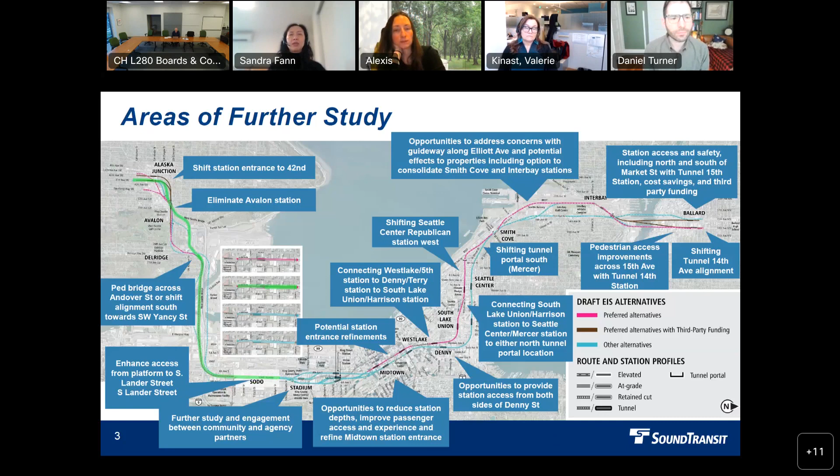This is just a quick snapshot. We actually have more details later for specific areas along the corridor where a lot of our engagement has been focused.

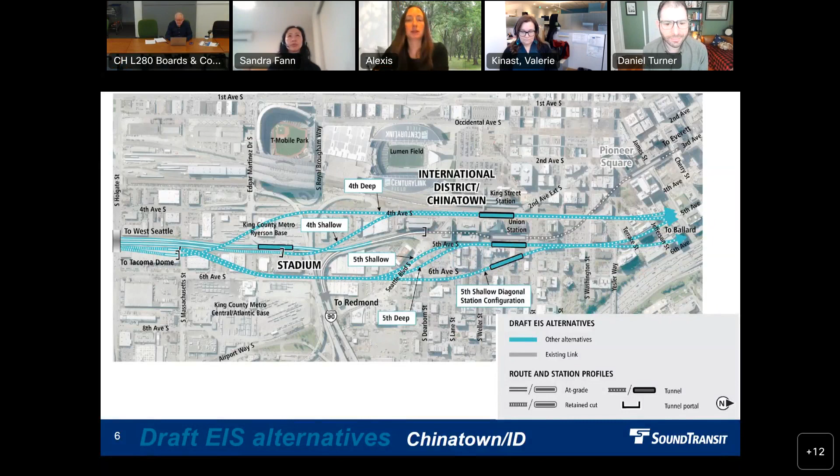So the board had directed a series of further study elements for the CID, including desire to seek to address the remaining questions, or minimize potential impacts and maximize community benefits, explore how to create an integrated, well-connected hub for all modes, opportunities to enhance ridership and access, activate or modify use of Union Station and Plaza, as well as funding and cost-saving opportunities. And then include study concepts requested by the community and agency partners, including but not limited to work to define a 4th Avenue shallow tunnel option with the goal to maximize benefits while minimizing costs and impacts.

Slide. Alexis, do you want to cover a bit of the engagement activities that we've conducted over the last several months? Yeah, I'm happy to. Thanks, Daniel. So you can see here some of the specifics of the engagement on transit in the CID.

The core of the work was workshops and open houses that spanned over the last 5 to 6 months. The goal was to have meaningful engagement that was iterative, so the intent was to have community feedback at each of those meetings shape the scope and direction of that further study efforts and engagement process. So that was the foundation of our engagement.

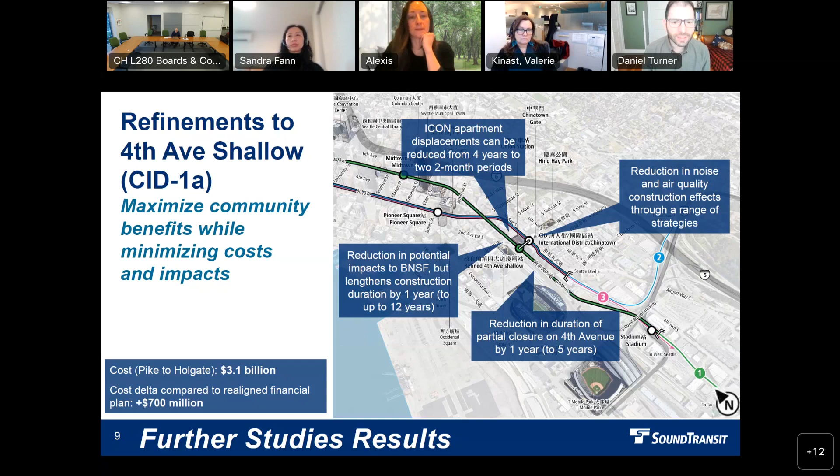So this is summarizing some of the community feedback that we heard through this process on the 4th Avenue shallow alternative. There was some interest in a shallower option to facilitate quicker transfers, but others were concerned about the additional potential impacts of the shallower alternative.

There was interest in any potential construction efficiencies across public projects to minimize disruption and harm to the CID and Pioneer Square residents. We heard a lot of concerns about construction duration and traffic detour effects with this option, including potential impacts to CID businesses, residents, and services. But there was strong interest in a transit hub with centralized access to the CID, Pioneer Square, and other transit modes, as well as activating Union Station as part of a broader community vision.

We'll talk about that in a few slides. And we definitely heard some interest in a Midtown Station location for access to First Hill.

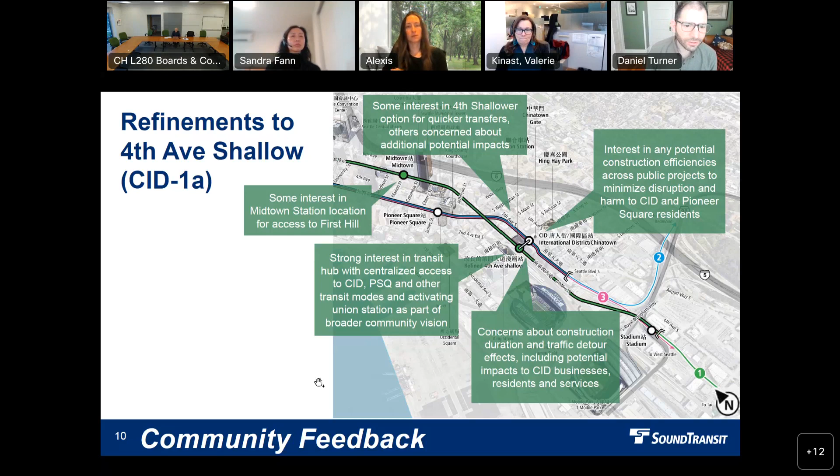Through the further study process, other station locations were identified for a station near CID. This option is called the station north of CID, and again, this came out of the community process that Alexis identified. I'll start with the costs here and then describe a bit about this option since it's new.

For that same segment identified in the previous option, this cost would be $2.05 billion from Pike to Holgate, and that's a cost delta of minus $360 million compared to the realigned financial plan.

I'll go through the graphic a bit before going through the comments. You'll notice the dot where the CID station is near Jackson Street—that would be the existing International District station. A new station here would instead be north of CID, adjacent to the Pioneer Square stations. You can see that green dot to the north there.

This would essentially consolidate the Midtown and CID stations into a single station and provide a transfer opportunity between the 1, 2, and 3 lines at Pioneer Square instead of at CID. A lot of that cost delta is because of the removal of a station with this option. So again, this consolidates the Midtown and CID stations.

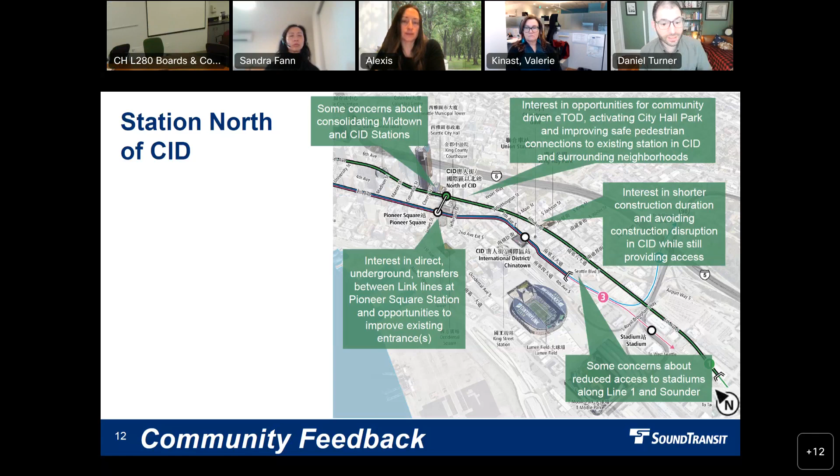Next option explored was the station south of CID. We'll start with the cost and then move over to the description. On the bottom left, this would be a cost of $2.5 billion in that same segment, and that would be a cost delta of plus $80 million compared to the realigned financial plan.

This alternative is shown on the graphic. Again, we'll start with that dot where the CID International District Station is at Union Station. Along the green line, you'll see a dot to the south between Seattle Boulevard and Royal Brougham Way. There would be entrances at Seattle Boulevard and at Royal Brougham Way, just south of Uwajimaya and near the existing stadium station on the south end.

This option would avoid direct station construction disruption in the CID, as well as present an opportunity for equitable TOD on that site.

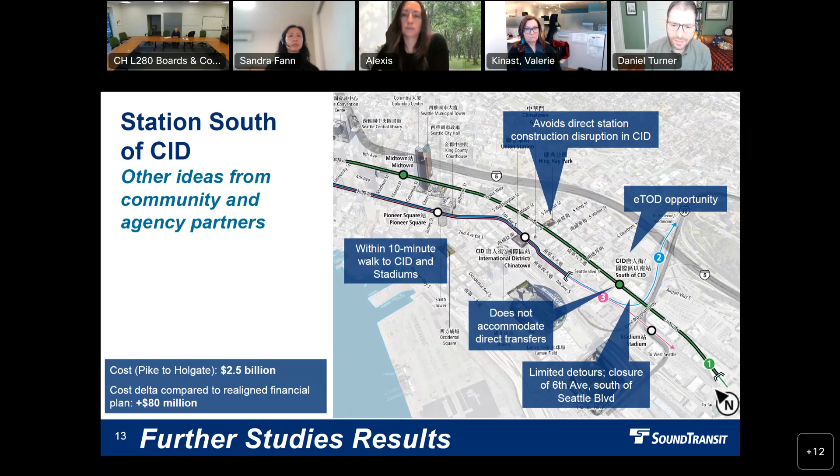Construction effects would be minimal with limited detours. The closure of 6th Avenue, which is currently closed, would be the primary construction effect here, between Seattle Boulevard and Royal Brougham Way. However, this option does not accommodate direct transfers between light rail lines. The station location would be within a 10-minute walk to the CID and stadium, so it's about a 5-minute walk up to Hing Hay Park from that Seattle Boulevard entrance.

Next slide, the community feedback. We did hear some interest in avoiding construction disruption in the CID while still providing access to the neighborhood. There was interest in the opportunities for equitable TOD, interest in trying to get an entrance closer to the CID with some public space. So we did explore a potential entrance north of Seattle Boulevard, which would be just south of the Uwajimaya parking lot.

There was interest in improving pedestrian connections to the existing station in the CID, the stadiums, and Sounder. But there were concerns that this option does not accommodate direct transfers between the link lines.

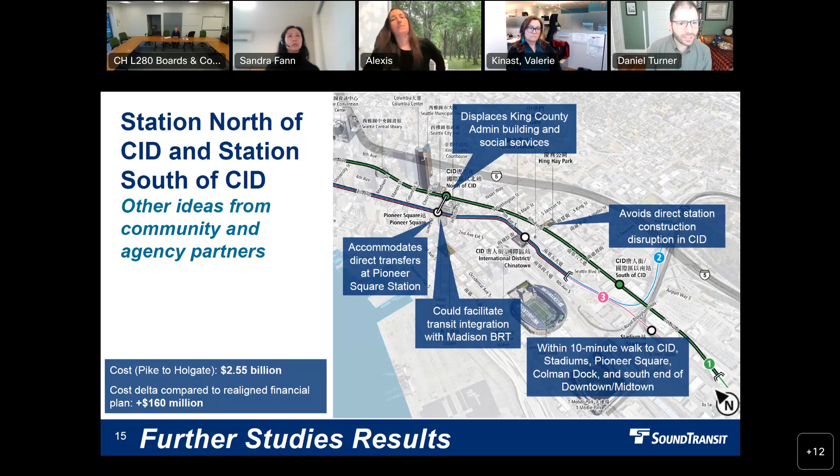And overall limited interest in this option without the North CID station being paired with it. So the next option is a combination of those two that we just discussed. This is a station north of CID and a station south of CID. The cost overall for this option would be $2.55 billion in this segment, which is a cost delta of plus $160 million compared to the realigned financial plan.

I'll just quickly describe this on the graphic on the right. Essentially, this would be taking the CID and Midtown stations and shifting them both a few blocks to the south. So again, that station north of CID connecting into the Pioneer Square station, that location being 2 to 3 blocks south of the Midtown station location.

And then the south of CID is the option that we just reviewed, with an entrance near Seattle Boulevard and Royal Brougham Way, a few blocks to the south of the International District Station.

So some description of this option. This is largely redundant, but we displaced the King County Administration Building and Social Services up near the north of CID option. We avoid direct station construction disruption in the CID. The access shed within a 10-minute walk includes the CID, stadiums, Pioneer Square, Colman Dock, and the south end of downtown. Again, there's the opportunity to facilitate a transfer between the Madison BRT, Rapid Ride G line, and Link at the Pioneer Square station and north of CID, with direct transfers accommodated at that north of CID option at Pioneer Square.

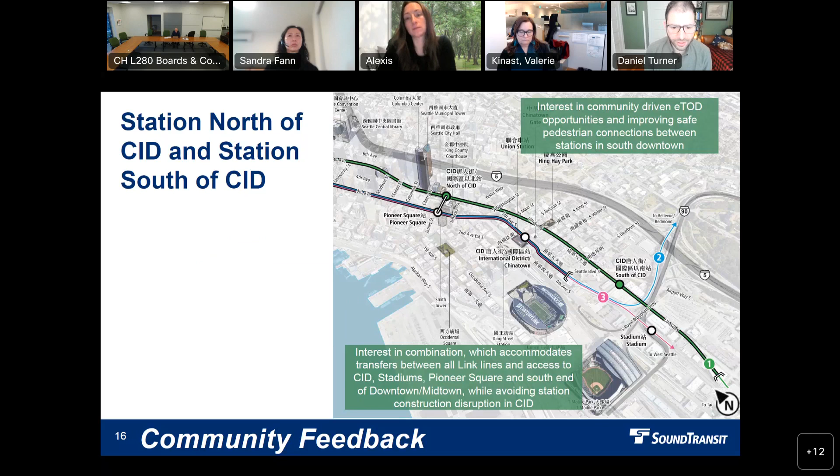Some community feedback here: some interest again in the community-driven equitable TOD opportunities, as well as improving safe pedestrian connections between the stations in South Downtown. And there was interest in this combination, which accommodates transfers between all link lines and access to the CID, stadiums, Pioneer Square, and south end of downtown, Midtown, while avoiding the station construction disruption in CID.

Some additional community feedback on this process overall and the Union Station: there was strong interest in activating Union Station and Plaza, which we heard throughout. There was interest in aligning the public projects occurring in this area, or that could occur, to limit impacts and contribute to a long-term community vision. There was strong interest expressed in additional park and green space in the area for the community, and strong interest in supporting the economic health of small businesses and maintaining the cultural hub, avoiding displacement of businesses and residents. Finally, strong interest in improving safety and pedestrian connections throughout the South Downtown area.

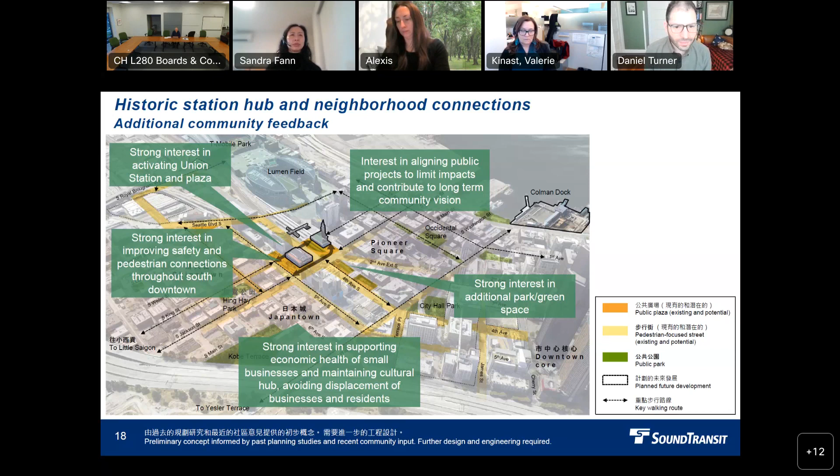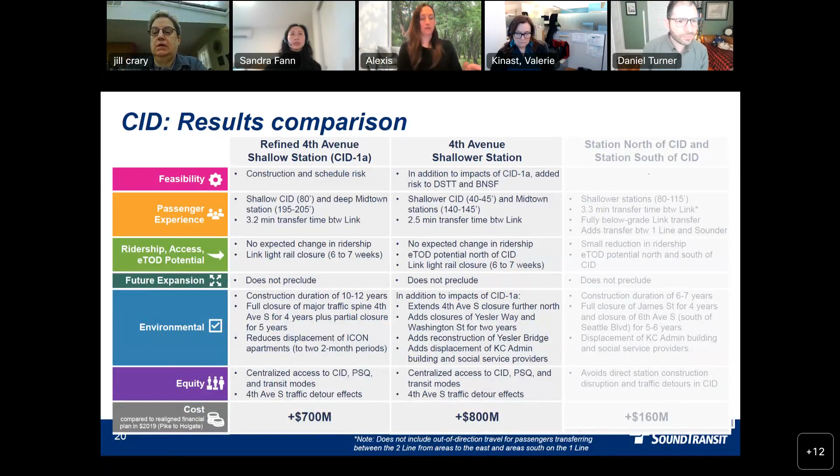I just had a quick question on displacement of the Icon apartments. What does that mean exactly?

Alexis, do you want to talk about Icon displacements? Yeah, I can talk a little bit about that. So Icon Apartments, they're located on 4th and Jackson, on the corner of 4th and Jackson. And they are, as I recall—Daniel, is it 2 month short displacements, right?

Yeah, so in the draft EIS, we identified 4 years, and the reason is because of the reconstruction of the viaduct that abuts the apartment and provides access to it. So the finding in the draft EIS was that reconstruction of that viaduct would restrict access and residents couldn't get to the apartment safely during that time. The additional work that was done identified an opportunity to...

work in some decking temporarily to provide access. I think there are times where that decking would need to be installed where access couldn't be provided. So there would be these 2 month periods where residents would have to be relocated temporarily, but that's a reduction from essentially a full displacement with the 4 year initial estimate, which was part of being responsive to community feedback and board action to further refine Fourth Avenue impacts.

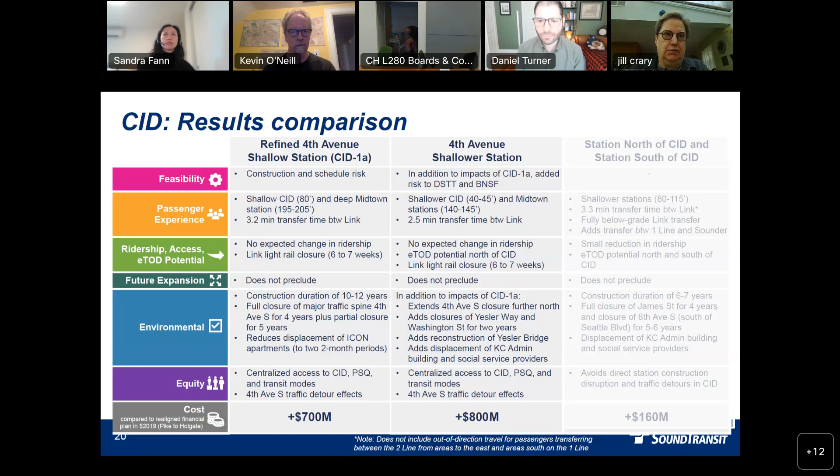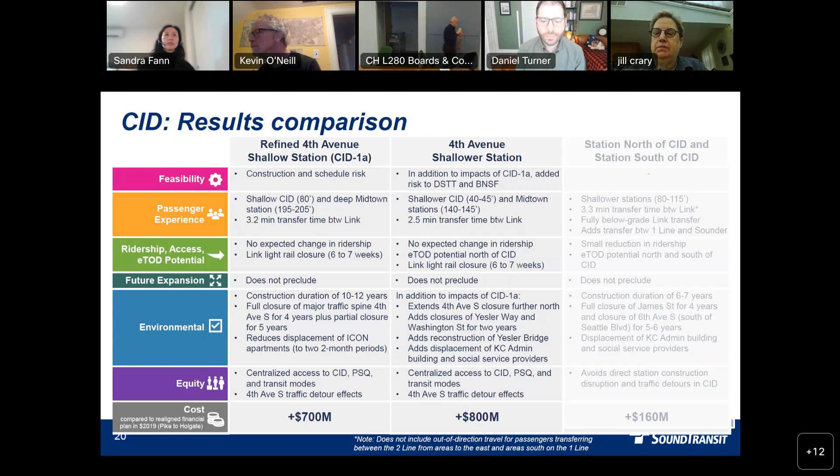Daniel, did you also - I heard you discuss this but I want to make sure I got it right - there are program goals that were established for different connections to all the different modes that were supposed to happen at the CID. And I believe you said that all of those moved to the North CID, and it can happen in conjunction with the Pioneer Square Station, all except for the Sounder. Is that the one that can't be met by moving? Yeah, maybe we can go back to the slide that shows the two, the north and the south.

Yeah, so you have that correct, that the link transfer would essentially move a station north. We find that would add about 3 to 3.5 minutes for a particular trip, someone riding in from the east side that would maybe want to go to the airport. So from the east side south, that trip you'd add 3 to 3.5 minutes because you're going one station north.

And for other transfers, it doesn't really make that big a difference in terms of travel time. The big difference is for Sounder and Amtrak, where with the 4th Avenue option, you're directly adjacent to the Sounder and Amtrak platform. So it's a bit different.

There's a variety of ways that Sounder transfers could be accommodated in this scheme. One might mean that if you were trying to get somewhere on the one line, you could board the 2 or 3 lines at IDS and then transfer at one of those transfer points.

We did also look a little further and see that the North Sounder access point, which is on the north side of Jackson, is about a 4-minute walk to the south station option from north of CID. It's actually only a 2-block walk. So for folks that could do that, they could transfer directly to the one line that way. But I'll point out that north station access is only stairs, so for people that need something other than stairs, that wouldn't be a good option.

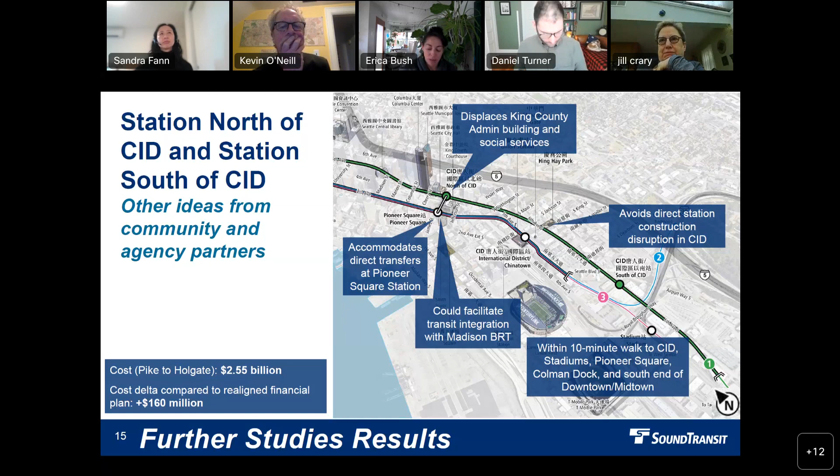That was one of my questions. And then I'd heard the community mention specific numbers of lost ridership with the loss of the Midtown Station, close to 16,000 a day, which doesn't seem minimal. So I'm trying to mentally make the connection between what you guys are seeing in your analysis and what I've been seeing from the community side regarding Midtown Station.

I'll touch just quickly on ridership, and then I'll turn to Sandra on the Union Station question. So the Midtown Station would essentially shift a few blocks to the south. So the riders don't go away, but they shift. What we're seeing through the ridership modeling is that riders would shift to the north of CID option or to Westlake Station. There's actually quite a heavy overlap in the walk sheds between Westlake and Midtown Station. Overall, a slight reduction in ridership as for a few connections, they become a little less convenient.

I will also point out that the deeper Midtown Station could have a potentially substantial effect on ridership, as the access times are more than what was initially assumed for station access. So there is a difference between the shallow Midtown Station and the deeper Midtown Station in terms of ridership and access.

Overall, with the shallower station north of CID, the overall access times could be lower for some people with additional surface travel. It's not that the 16,000 goes away, it's that it shifts, and maybe a few riders are choosing something different. Very specifically, a lot of the ridership in Midtown is driven by those office buildings. So if folks are seeing it's a little bit longer, they might walk, or they might take the 2-3 line. Patterns might shift a bit, but it doesn't disappear when the station's removed.

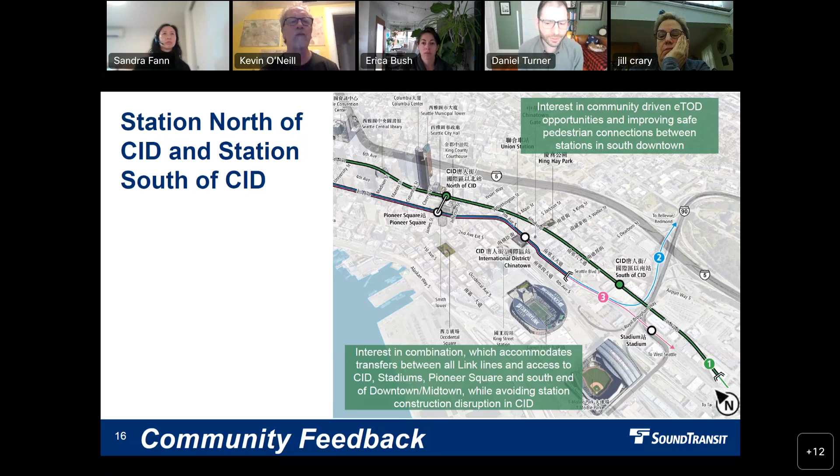Just a little bit on the Union Station activation. This was something the board asked us to take a look at in our July action, as part of the further studies, and definitely a common theme in our engagement with the community, an interest in activating Union Station. Conveniently, we have a station there already, so there's some reason for us to also consider improving that area to support the station we already have. That's something that's going to be up for consideration by the board, looking at Union Station activation regardless of which alternative moves forward.

That's great. Elizabeth? Yeah, I appreciated Daniel's descriptions of some of the transfers, and I think of all of this as a regional transit system as well. So I'm wondering if you have any kind of visualization, a flyover of how some of these alternatives might work. It's almost a video game opportunity, because you have an existing system and you're building onto that system, so what happens? What are all the layers of things that need to occur? This might be a rhetorical question, I apologize. Is there any look at the entire system? How does that fit into this planning?

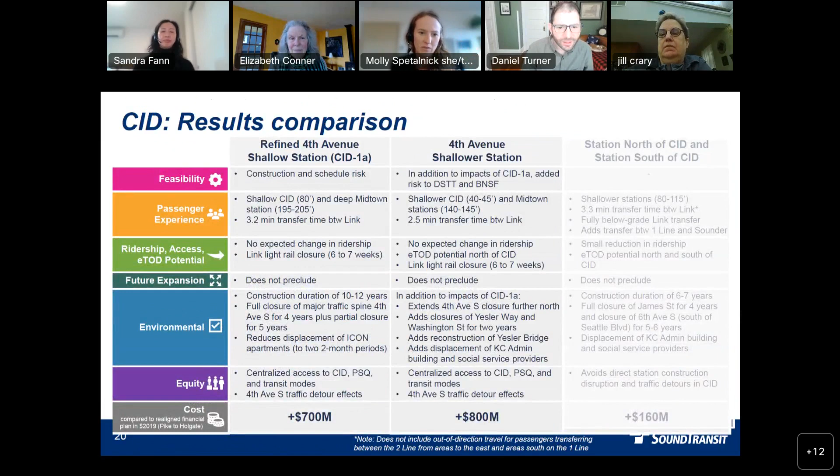So you're having to either come up at the existing platform using the existing escalator, elevator or stair, or you would come up in the back of Union Station there, the new escalator and stair elevator combination, exit Union Station, and travel down to the existing northbound platform using the existing entrance.

That's the situation here. At Pioneer Square, you would actually be going from mezzanine to mezzanine. You would come up at the new station - I apologize, I don't have a visualization directly handy, we may be at the end of this deck - come up to the mezzanine level, you'd be going underneath James Street. The tricky thing is there's the BNSF tunnel directly there, because nothing's very simple in Seattle. So you have to go over the BNSF tunnel, come down a level, and there would be escalators, stairs, kind of a short down movement, as well as 2 elevators, go across, and then you'd be in the mezzanine at the Pioneer Square station. So you can kind of imagine it's mezzanine to mezzanine.

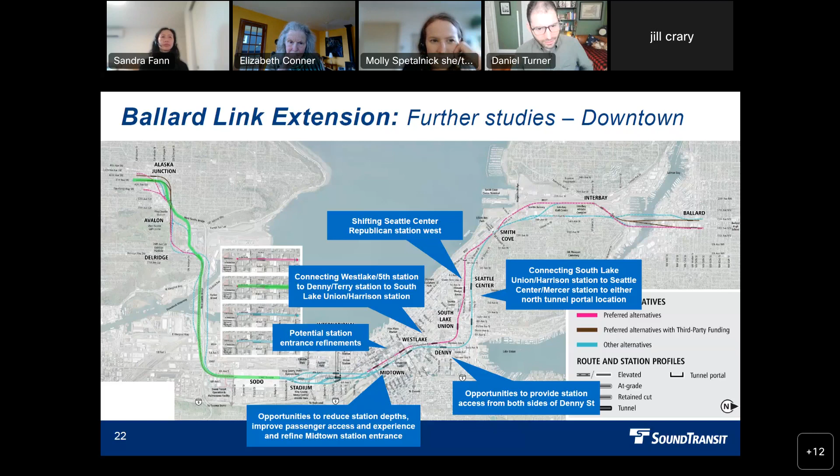Yes. Right, so for the downtown segment, at a glance, we had over 20 engagements with community groups. We had 5 workshops, outreach.

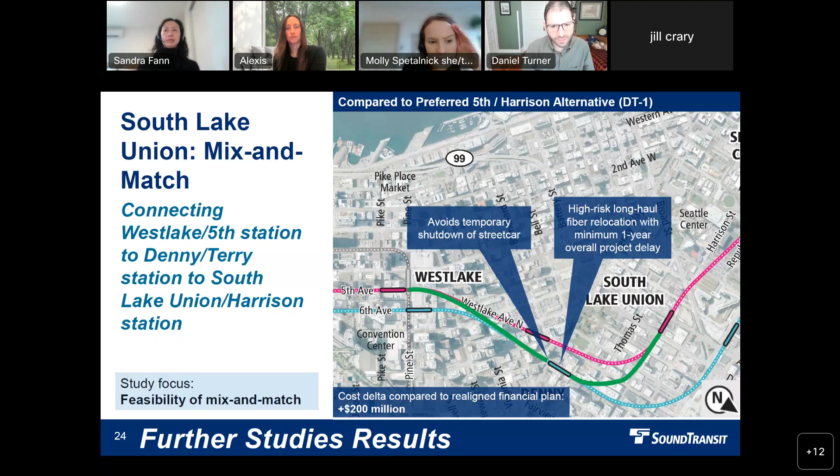Some of the community feedback we heard on this option: there was interest in the Denny Westlake station location for DT1, for access and transit integration, and interest in access from both sides of Denny and opportunities to expand the walkshed. There were concerns about the additional cost, risk, and project delay associated with the Denny Terry station location, but some interest in the mix and match to avoid construction effects to Westlake, including the streetcar, buses, and other traffic and utility effects along Westlake Avenue.

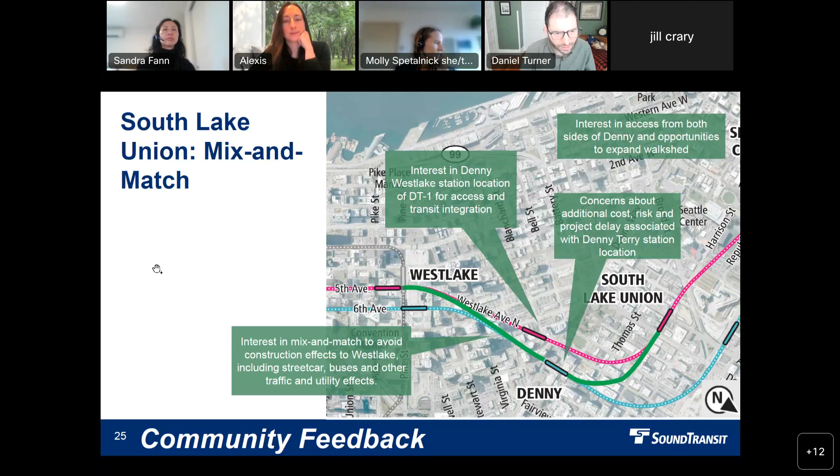I'll go very quickly through the results comparison. The draft EIS option is shown on the left, DT1, and then the mix and match. There was a finding of a less convenient transfer to transit on Westlake Avenue with the Terry station location, as well as the introduction of construction and schedule risk. There's a minimal impact to ridership with this location overall.

I will say we also looked at an opportunity, covered later I think, to have entrances on both sides of Denny Way with the Terry Avenue station. This would include moving station entrances into the right of way. We found an ability to provide those entrances and actually reduce the cost by about $10 million overall, compared to the plus 200 million.

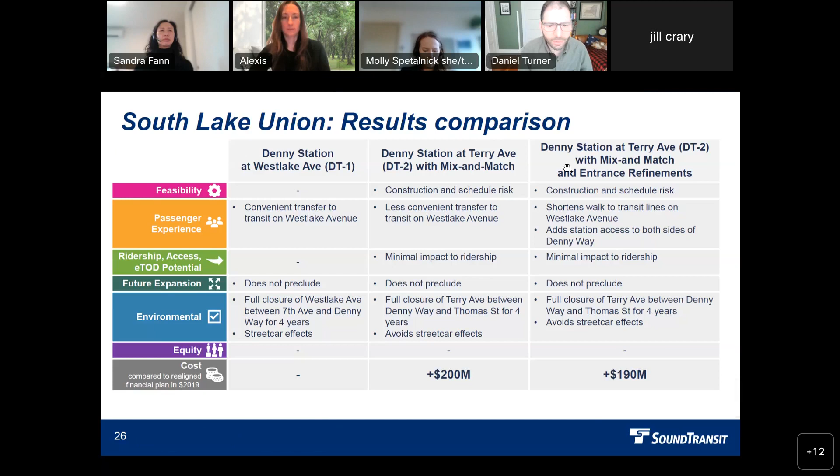The other mix and match that we looked at was at the Seattle Center station. This included connecting the South Lake Union Harrison station to the Seattle Center Mercer station, and then looked at either portal connection to the north. What we found was that the connection to the Republican portal was not practical due to operational issues that I mentioned earlier.

This would include the partial closure effects on Mercer Street associated with the Mercer station location. It would avoid the construction effects of the Northwest Rooms that were associated with the Republican Seattle Center station. It would add 15 additional residential and 24 additional business displacements. We did find that the noise and vibration effects to the Seattle Opera, King FM, and McCaw Hall could be mitigated. This would introduce essentially a new alignment going underneath those entities. I should point out that we did find it was practical to connect those South Lake Union and Mercer stations, but this would also have a cost delta of 210 million compared to the realigned financial plan, plus 210.

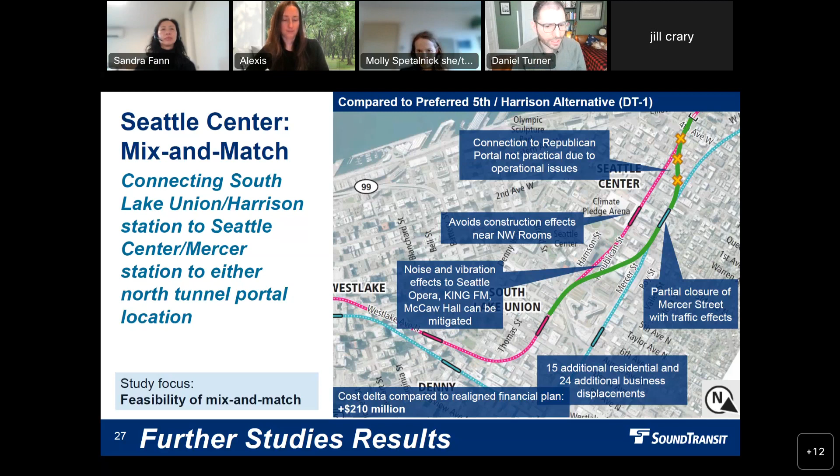Some of the feedback we heard was strong concern about residential and business displacements with the station on Mercer Street, and concerns about potential traffic effects on Mercer. There were some concerns about the additional costs associated with this mix and match and the distance to Climate Pledge Arena and the Seattle Center. But there was interest in the location to avoid construction effects near the Northwest Rooms, still provide access to the Seattle Center and Uptown community, and the potential for equitable transit-oriented development. And some concerns about noise and vibration effects during construction to the Seattle Opera and McCaw Hall.

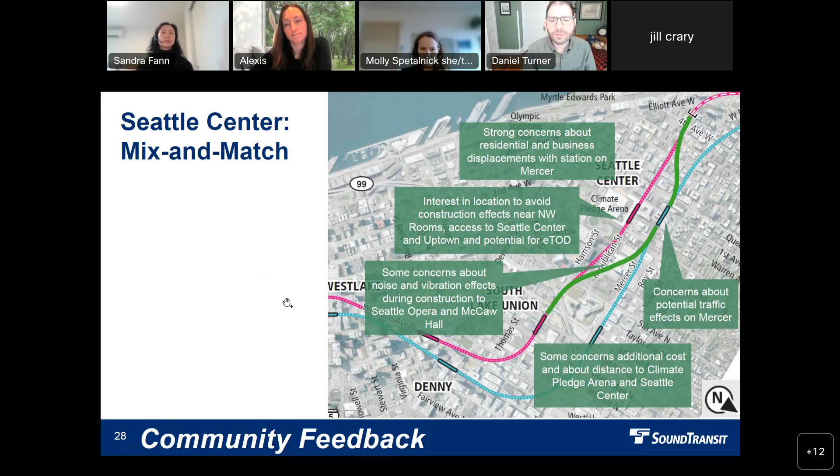Another refinement we looked at was shifting the Seattle Center Republican Station to the west. You can see on the pink line the location studied in the draft EIS, just to the north of the Climate Pledge Arena. I apologize for all these north arrows flipping around—north is kind of to the bottom right on this. This would shift the station a couple blocks to the west along Republican Street.

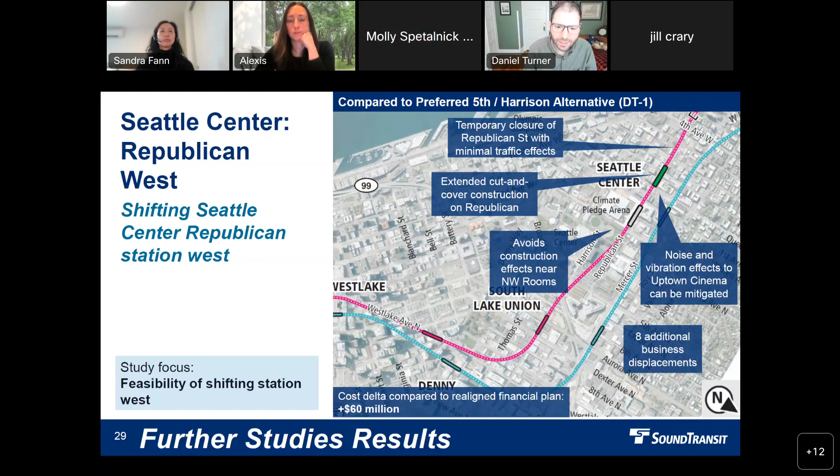This would include temporary closure of Republican Street, which would have some access effects but minimal traffic effects during construction. It would extend the cut and cover construction on Republican a longer distance. It would avoid construction effects near the Northwest Rooms. There are noise and vibration effects to the Uptown Cinema that can be mitigated, specifically referring to during operations. There would be some construction effects adjacent to the Uptown Cinema, and 8 additional business displacements. And this would add $60 million compared to the realigned financial plan.

Next slide. Is that okay? We're gonna go through the entrance refinements, and then we'll be able to pause for questions.

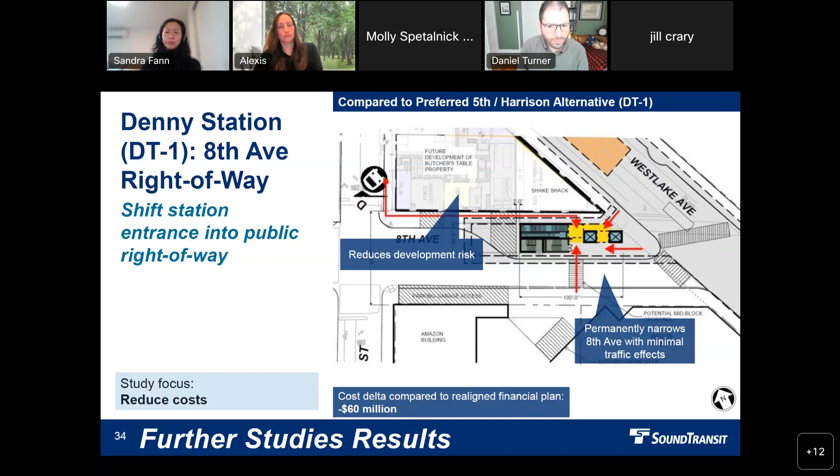And then lastly, in downtown, we looked at a couple different options for the Midtown Station entrance locations. This one is north to the left now. I hope you're not getting dizzy.

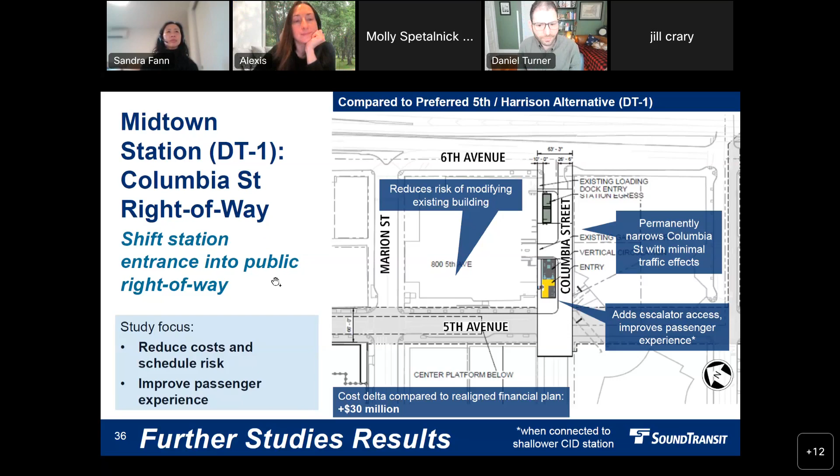It would permanently narrow Columbia Street down to a single lane, but this would have minimal traffic effects given the volumes on that street. It would also add escalator access to the station entrance, which was not able to be provided because of the footprint constriction in the draft EIS. But this would only be for the shallower Midtown Station option. So we have an asterisk there - this wouldn't work for the deeper station option. So that's Columbia Street. Next slide.

Okay, we'll pause for questions. I hope that was clear, if not quick. I'm going to look for hands up. I see Erica. Should I just jump in? Absolutely, okay, thank you. I was trying to keep up. That was quick.

With the Columbia Street condition, and it looks like also with this 4th Avenue option, do you guys have a better understanding of what happens to the sidewalk conditions in these areas, how constrained they would be for pedestrians if we were to shift access onto the right of way?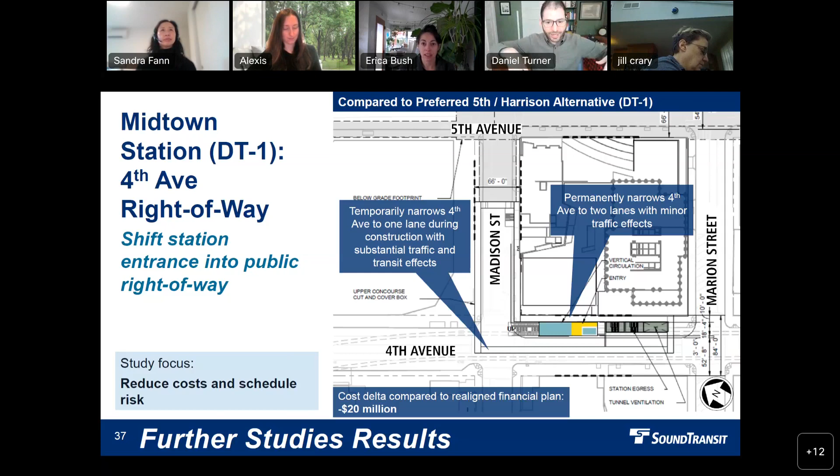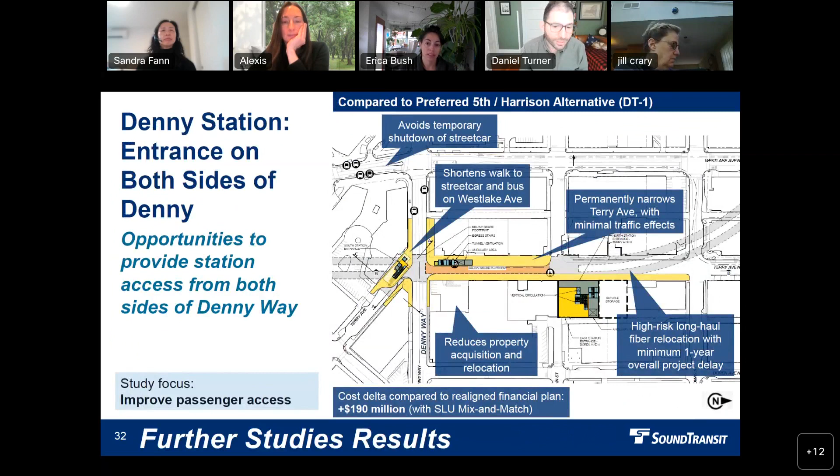I don't have photos here, but we have some examples from other stations. The one that comes to mind for me is in New York on the new 2nd Avenue subway - they have a nice glass canopy that comes out and consolidates everything, but it's in the right-of-way. So if you go back, Alexis, to the Denny options, and maybe the Lenora, or this one - actually, go forward to the one that shows Lenora because it's zoomed in a bit. You can see that it's actually quite a bit more substantial than Pioneer Square.

So we see an opportunity to provide more of a station entrance, but in the right-of-way. Again, it depends on the space available. I'll point out that these options at Denny would be larger. We think the Columbia option could be fairly substantial. The Madison one would probably be a bit narrower. And then when we talk about Ballard, that might be a similar configuration to the Pioneer Square option. Okay, great, thank you.

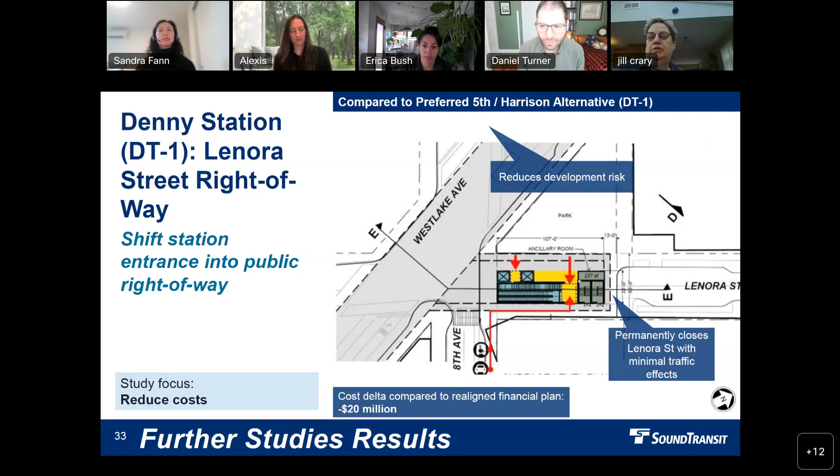Okay, and perhaps we should move on and try to get through Ballard.

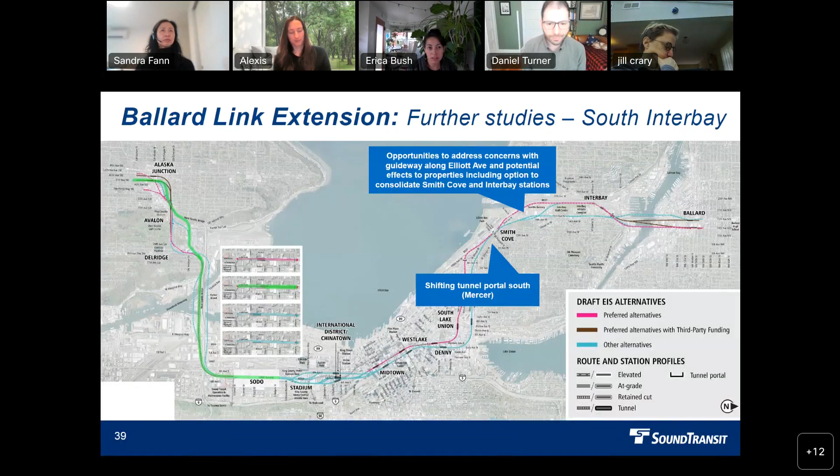Interbay Smith Cove, further studies and community feedback. A couple of studies identified opportunities to address concerns with the guideway along Elliott Avenue and potential effects to properties, including options to consolidate Smith Cove and Interbay stations, and also a study to look at shifting the Mercer tunnel portal to the south to avoid concerns about the steep slope where that tunnel portal was planned.

Because Alexis is having audio issues, I'll just quickly run through that. We conducted 3 workshops and open houses for this segment, 8+ community briefings and meetings, 2 online surveys, and over 700 survey responses.

A few different options that we looked at. North is to the right, I think this is consistent throughout, so hopefully that helps you get oriented. The modified SIB1 alignment is the DEIS preferred Galer Street Station location, and the modification here was to shift the Interbay station to the south to straddle Dravus Street.

This would avoid 20 businesses being displaced, as well as the Seattle Storm practice facility that's planned there and a planned Seattle City Light substation. It also adds a station entrance on both sides of Dravus Street, improving passenger access, but would also add temporary lane closures to Dravus for 1.5 years to construct underneath it. The station would essentially be underneath Dravus Street with entrances on both sides.

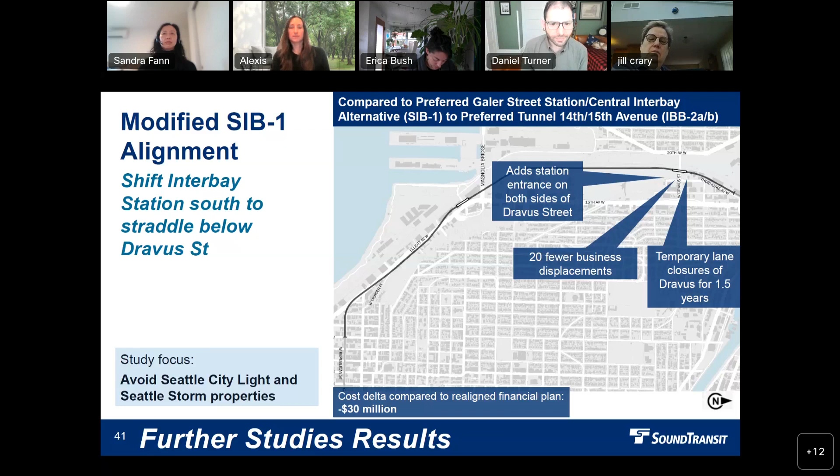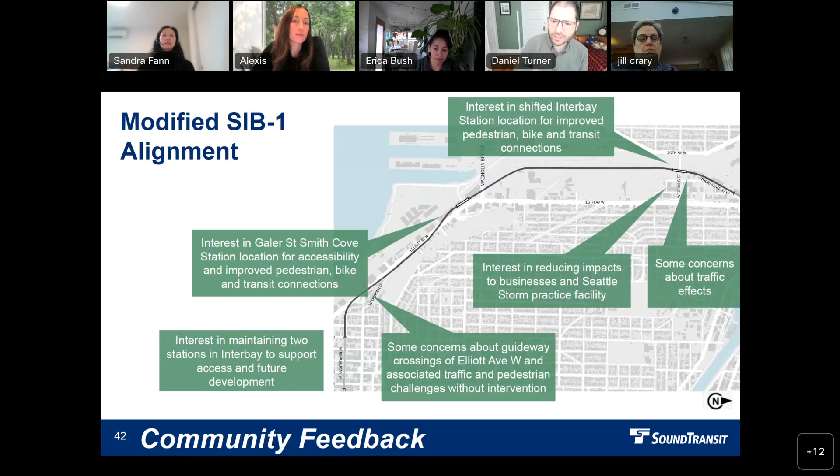Feedback we heard was interest in the shifted Interbay station for improved pedestrian, bike, and transit connections. There were some concerns about traffic effects during construction, and interest in reducing impacts to businesses, including the Seattle Storm practice facility. There are still concerns about guideway crossings of Elliott Avenue, essentially the same as in the draft EIS. But there's interest in the Galer Street Smith Cove station location for accessibility and pedestrian, bicycle, and transit connections, and interest in maintaining 2 stations in the Interbay area compared to the consolidated option, which I'll cover in a moment.

This is the modified SIB-3 alignment, which goes to the Mercer portal location. We found, unfortunately, that the shifted portal location was not practical for the Mercer portal. There's an opportunity for partnership for ETOD - this would shift the Smith Cove station location from the south side of the Magnolia Bridge to the north side, adjacent to the edge of the Armory property, creating a lot of opportunity for equitable TOD at that property. Similar to the other option, the Dravus location would straddle Dravus Street for the Interbay station.

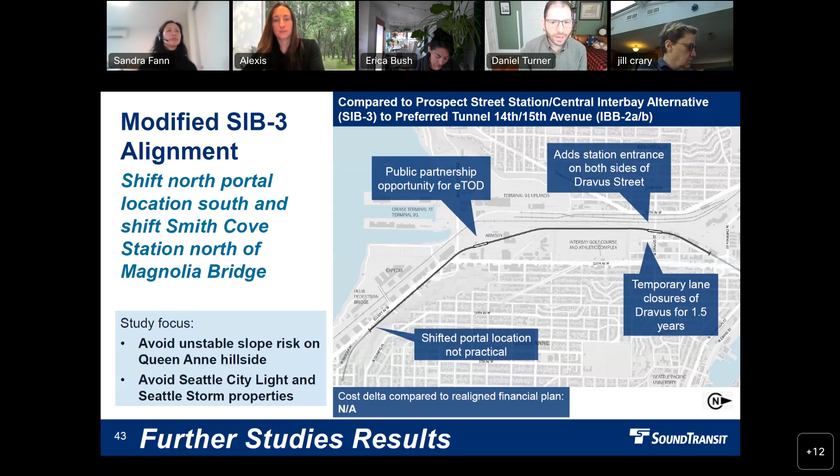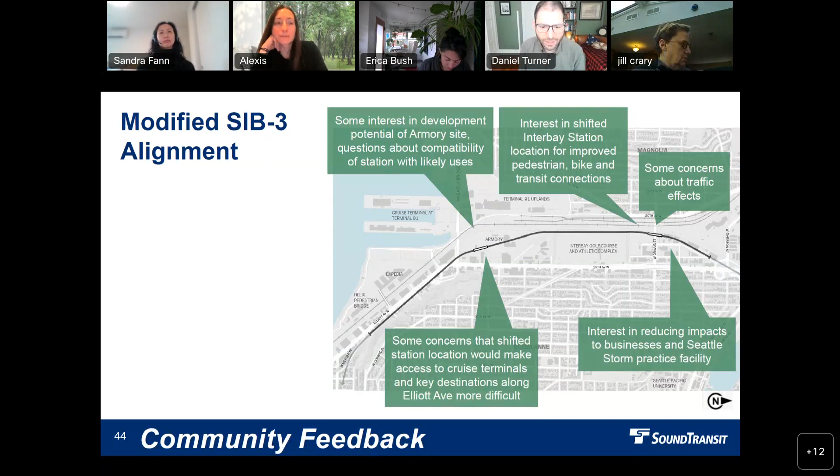There was interest in the development potential of the Armory site, but questions about the compatibility of the station with the likely or potential land uses there. Same interest in the Interbay station options, and some concerns that the shifted station location would make access to the cruise terminals and key destinations along Elliott more difficult for the Smith Cove station.

And lastly on this: concerns about a single station reducing access to the surrounding neighborhoods, the potential for TOD along the corridor, interest in extending the tunnel alignment, potential redevelopment opportunities, and interest in fewer property and traffic effects with the consolidated station.

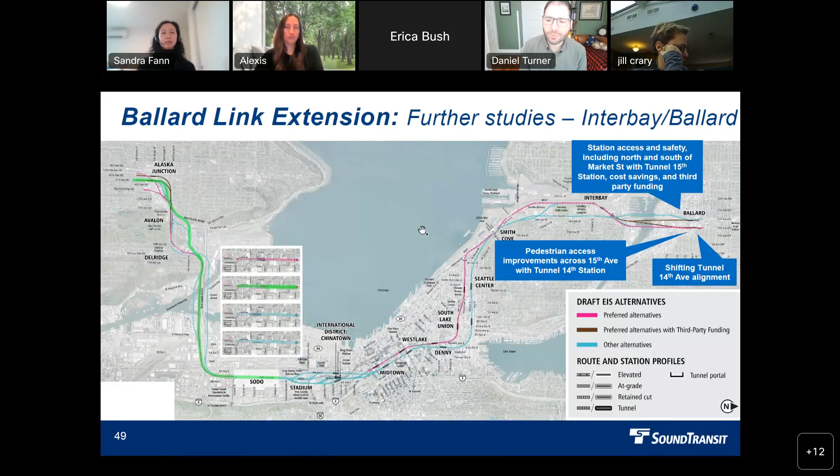For the Tunnel 15th station, you see 15th there in the middle, north is to the right. We're looking at reducing costs essentially, so what we found was an opportunity to reduce the number of station entrances as well as the amount of property being used to construct the station.

So we are showing there's no entrance at 53rd Street, which was in the draft EIS, which would reduce access from the south, or mean a longer walk for people on that side. It would reduce the construction staging area and avoid displacement of the Safeway store assumed in the draft EIS, but also reduces opportunities for equitable TOD on that site.

We also found potential to reduce the size of the west station entrance and avoid that property, similar to what I referred to with the Pioneer Square station. That would lead to a very slim station entrance along Market Street, similar to Pioneer Square, and there would be concerns on the capacity of that entrance and future growth in ridership.

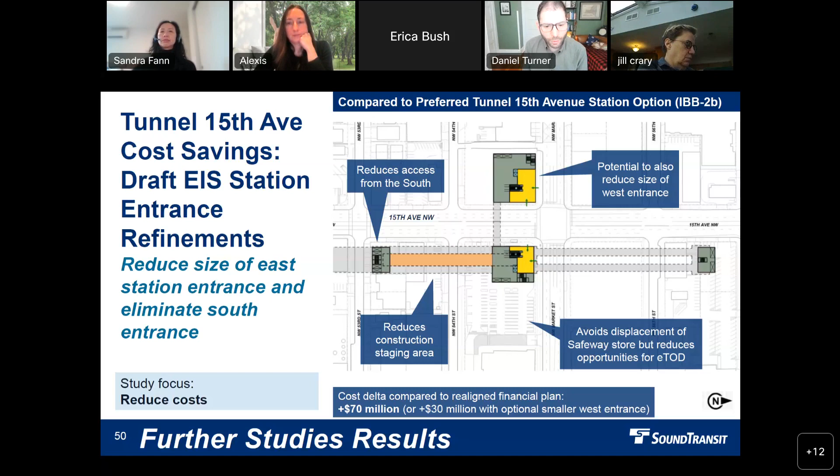The cost delta compared to the realigned financial plan is plus 70 million. Recall from the draft EIS that was about plus 200 million, so these savings reduce that considerably, or plus 30 million with the smaller west entrance option.

There was general interest in the cost savings ideas that support siting a station at 15th Avenue, and strong interest in the Tunnel 15th station location with access on both sides of 15th. There was some concern about reducing future capacity with the smaller entrances, specifically that west entrance, and concerns about reduced equitable TOD opportunity with the reduction in property.

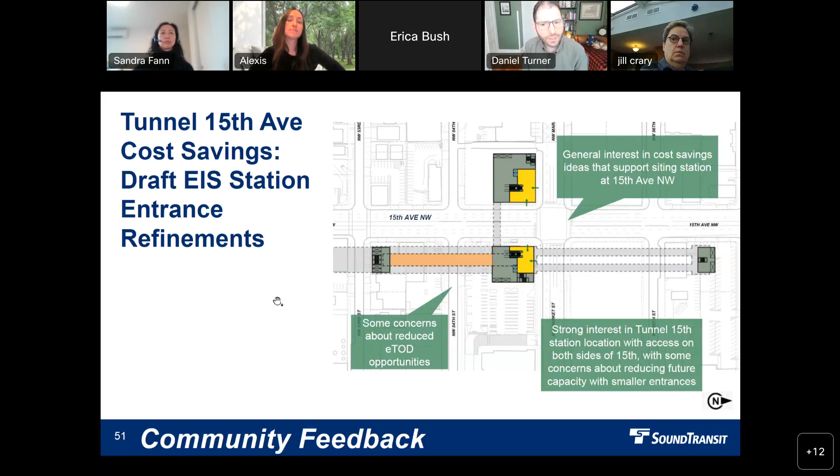We also looked at shifting the entire station into the right-of-way. The station in the draft EIS and previous concept is actually being constructed within private property on the east side of 15th; this would shift that construction into 15th Avenue and include just those two entrances. The big effect is a partial closure of 15th Avenue for 4 years, which would have fairly substantial traffic effects during construction, and temporary partial closures of the intersection of Market Street and 15th Avenue. This would have similar cost savings to the other option reviewed that keeps the station out of the public right-of-way.

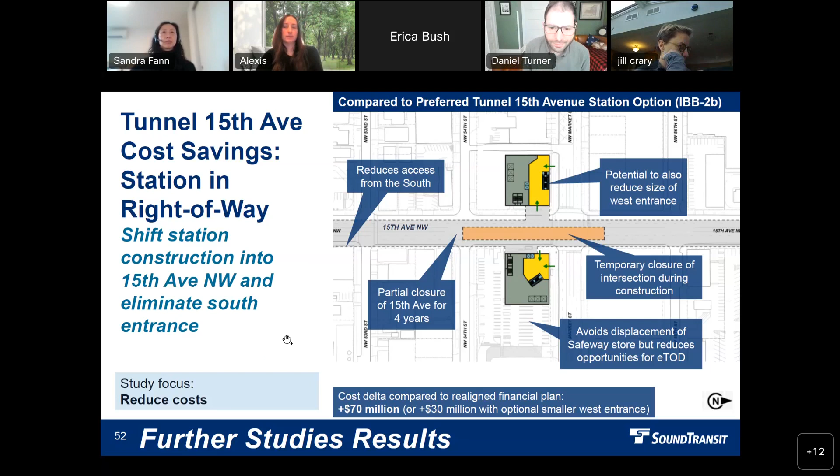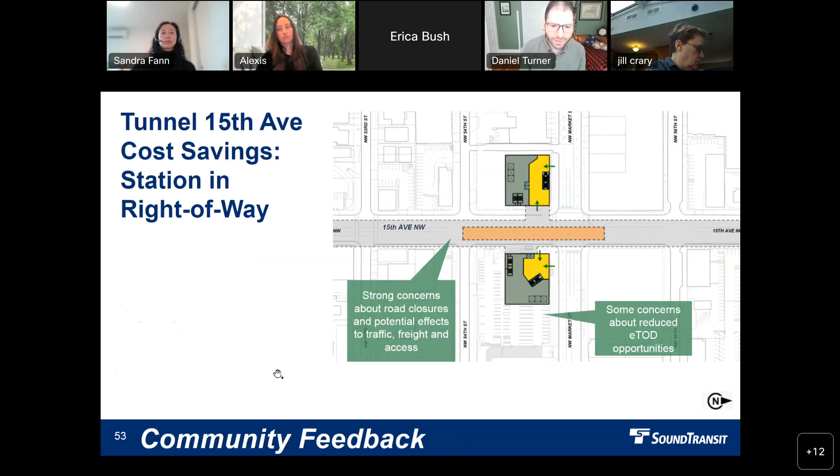Strong concerns about the potential roadway effects during construction to traffic, freight, and overall access.

We also looked at siting an entrance to the north of Market Street, which could work with either of the two cost-saving options for 15th. You can see a slim entrance in the street on the north side, the northwest corner of Market Street. This would reduce 15th Avenue from 7 to 5 lanes in this section. There would be temporary partial closures of 15th Avenue for up to 2 years, probably an additional lane or two to construct that station entrance, and that would connect underground to the planned station entrances on the south side of Market Street.

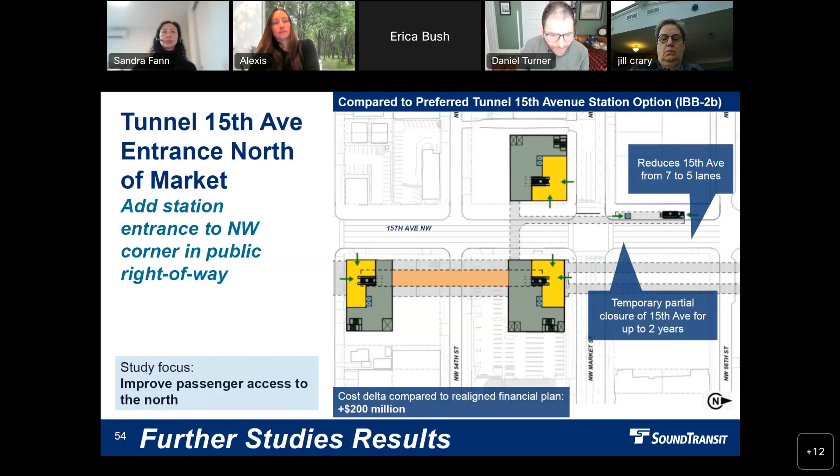This would have a cost delta compared to the realigned financial plan of about $200 million, but I think this is including that south entrance, so I'm not entirely sure about that.

Next slide. There were some concerns about potential traffic effects associated with construction of this option, but interest in the entrance north of Market to expand access.

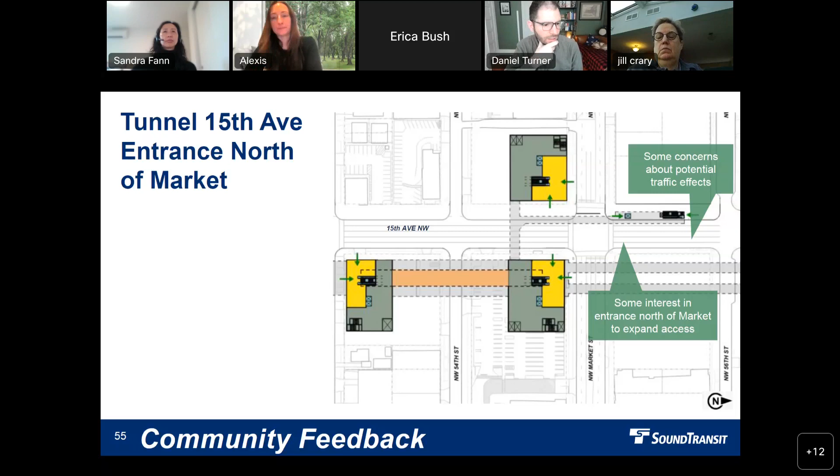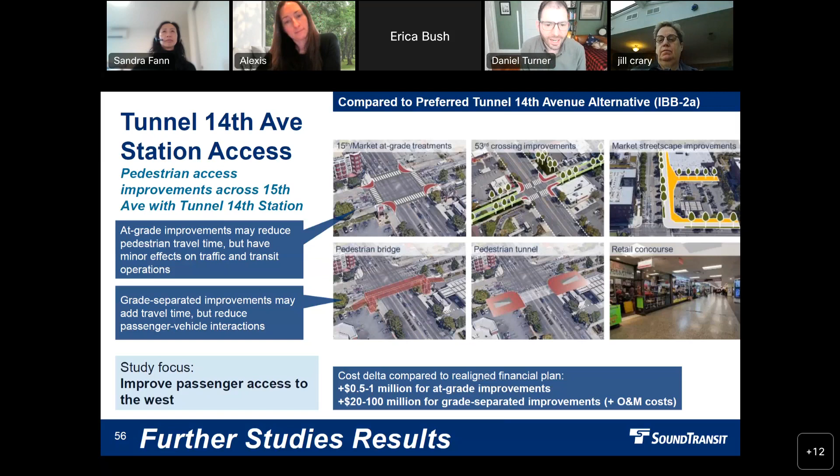Next slide, I'll go over this quickly. We looked at some potential options to improve access along 15th at the 15th and Market intersection to access the 14th option. These represent all sorts of different costs, including surface improvements and pedestrian bridges, so everyone can peruse this in their own time.

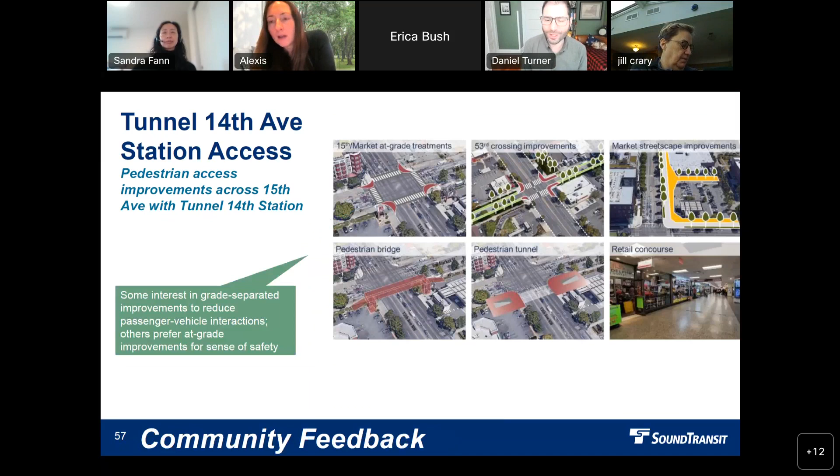There was some interest in the grade separated improvements, but others were interested in the at-grade improvements.

Lastly, we looked at shifting the Tunnel 14th Avenue station out of the public right-of-way and into private property to reduce costs, which is a bit counterintuitive with the other option, but there are cost drivers associated with constructing within the 14th Avenue right-of-way. This would avoid the Safeway property, which is the primary cost savings, but reduces the equitable TOD opportunity considerably.

It would also require an additional street crossing to access the station from the west, and it would save $140 million compared to the realigned financial plan.

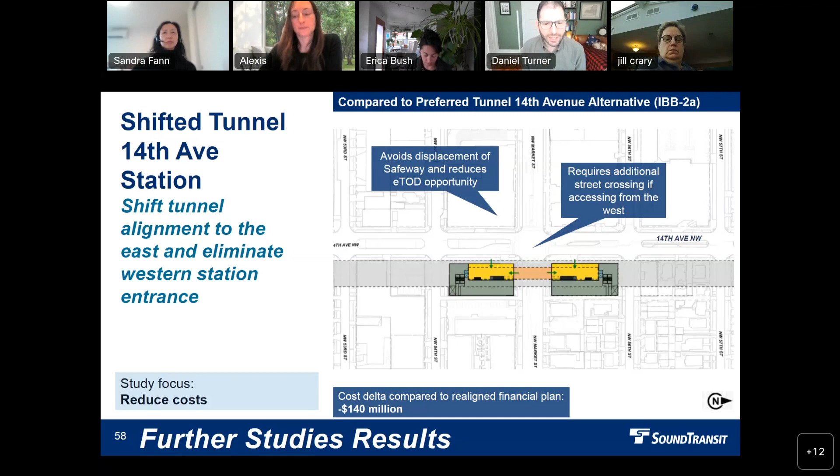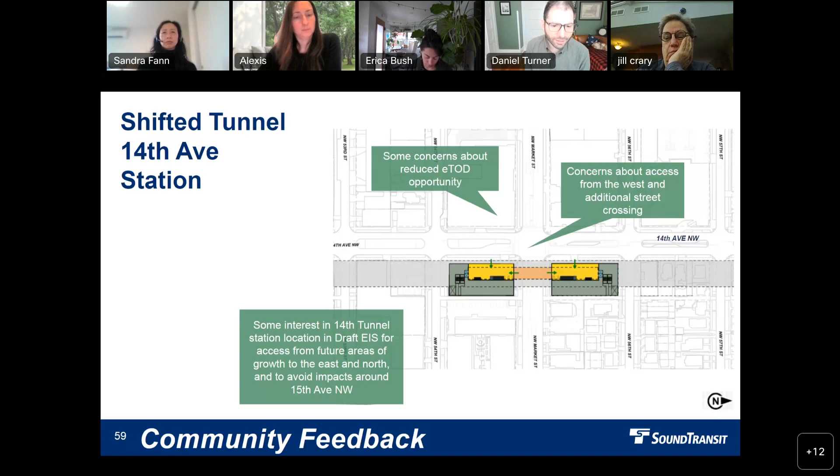There were some concerns about that reduced equitable TOD, concerns about the access from the west and the additional street crossing. There was some interest overall in the Tunnel 14th station location during the draft EIS process, including the ability to accommodate future areas of growth to the east and the north and avoiding impacts around 15th.